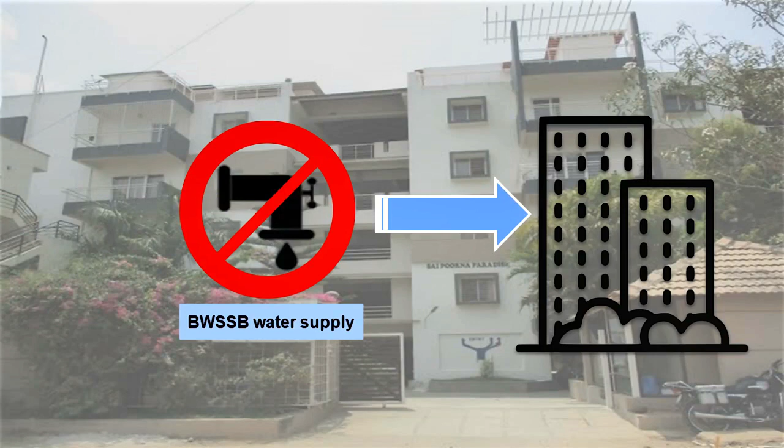The apartment complex requires about 50,000 to 55,000 litres of fresh water a day, and the per person water consumption is around 250 to 300 litres a day. The community does not have a Kaveri water connection, so they primarily relied on borewells and water tankers for their water needs.

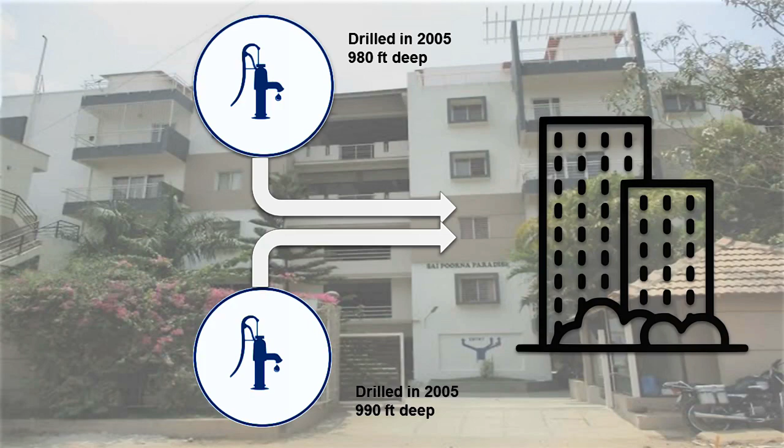The two borewells drilled in 2005 have been a primary water source. Over time, the borewell yield began declining, leading to a rise in the apartment's reliance on water tankers. Starting in 2017, the complex began heavily depending on water tankers for its daily water supply.

During an 8-month period from November to June, around 11 to 13 tankers, each with a 5,000 litre capacity, were procured daily at a cost of Rs 550 to Rs 600 per tanker. This reliance translated to an annual expenditure of Rs 16 to 18 lakhs.

Sai Poorna Apartments opted against obtaining a Bengaluru Water Supply and Sewerage Board Kaveri water connection due to the steep sum required as a deposit. Instead, the association has chosen to enhance water supply through alternative initiatives. These include rooftop rainwater harvesting, groundwater recharge, individual household metering, and using treated wastewater.

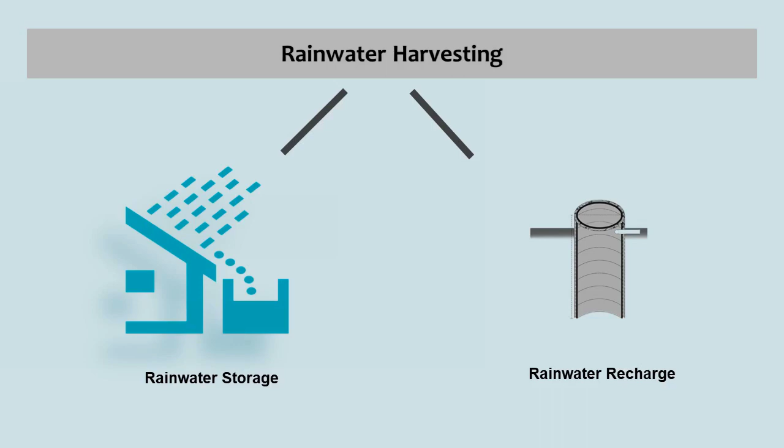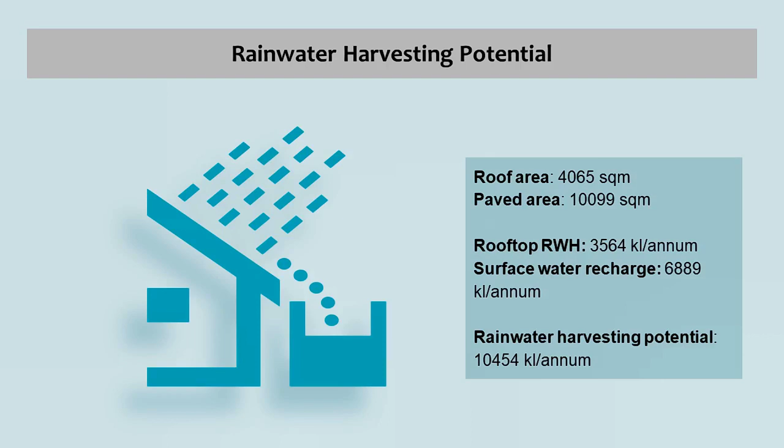Between 2017 and 18, Sai Poorna Paradise integrated rainwater harvesting and surface runoff into its water management strategy. This harvested rainwater serves a dual purpose, recharging the groundwater and providing a stored water source for various needs. Through meticulous calculations accounting for runoff and surface area, Sai Poorna Apartments can potentially harvest 10,454 kilolitres of rainwater annually.

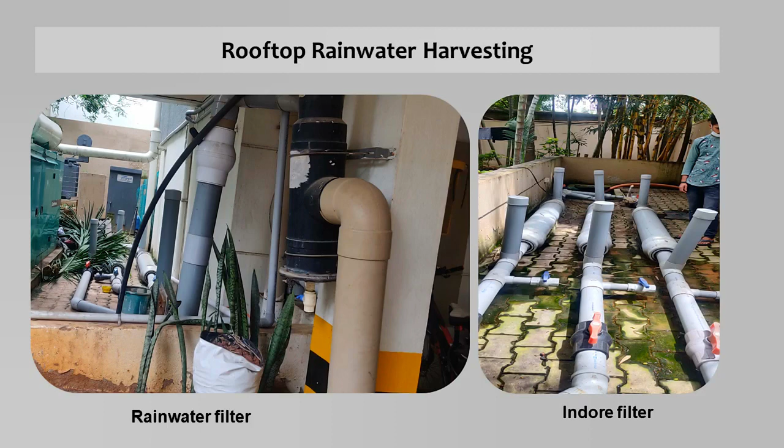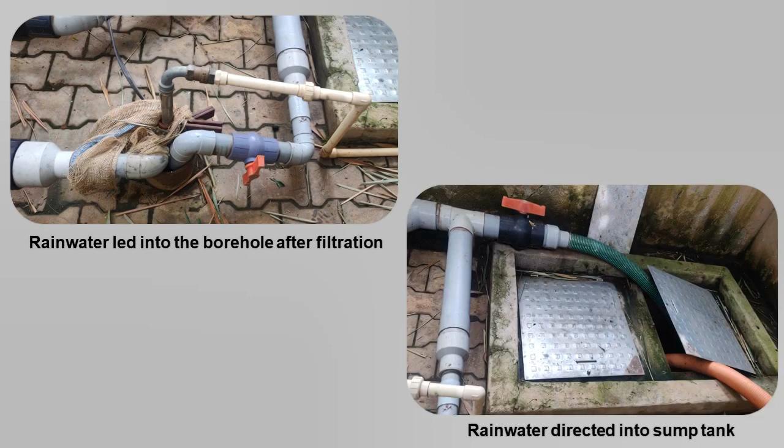The rainwater is filtered in a rainwater filter and subsequently passes through an in-pipe sand filter referred to as the Indore filter. This Indore filter incorporates jelly stones or crushed chips with sizes ranging from 20 mm to 40 mm. After filtration, the water is let into the borewells. A portion of the rooftop rainwater is guided to a sump tank via a controlling valve.

In 2018 and 19, 4 recharge wells were dug in low-lying areas which efficiently managed surface runoff. These wells, each measuring 5 feet in width, comprise 2 that are 15 feet deep and the other 2 which were initially 5 feet deep and deepened to 10 feet.

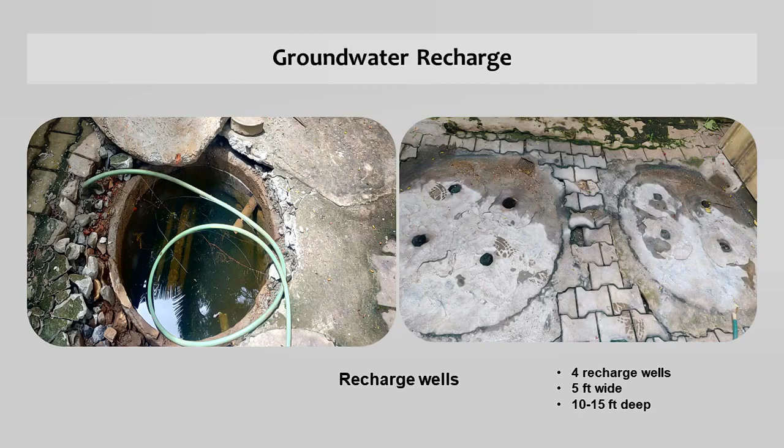The objective of the Residents' Welfare Association was to attain complete independence from water tankers. To achieve this, they introduced individual household metering in 2019-20. The apartment charges a fee of Rs 100 per kilolitre, equivalent to 10 paisa per litre, for water usage.

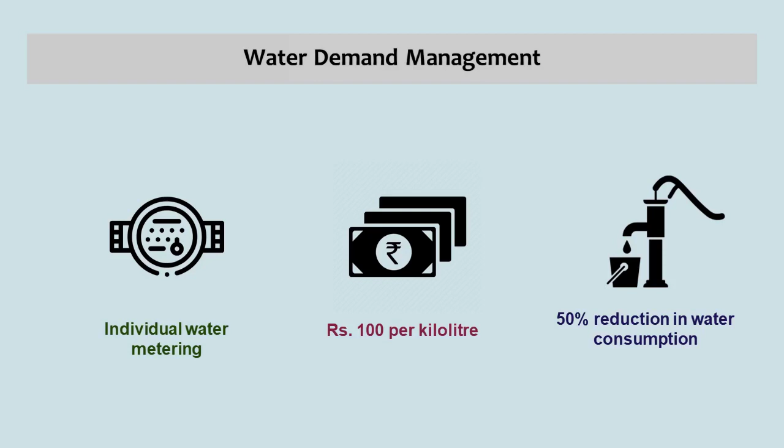Following the installation of these household meters, the water demand experienced a 50% decline. That is, the aggregate water demand decreased from 50,000 to 55,000 litres down to 27,000 litres per day. The apartment also houses a 60,000 litre capacity sewage treatment plant upgraded with silicone diffusers in 2019-20.

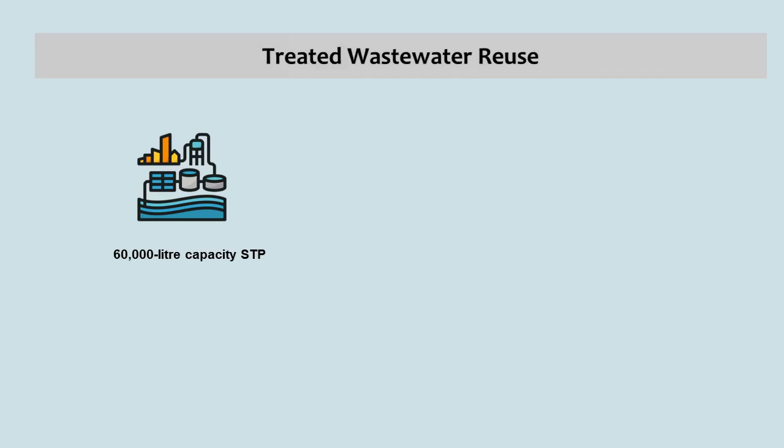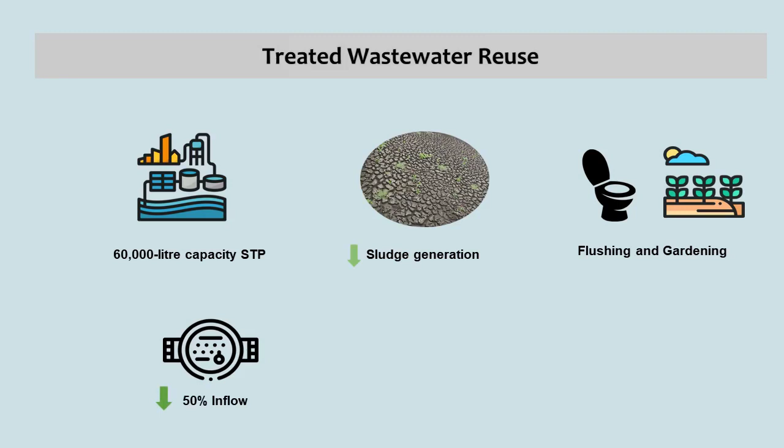This not only reduced sludge generation but also significantly lowered operational cost for the STP. The treated wastewater from the STP is used for flushing and gardening. With individual household metering, there was a notable reduction of 50% in the inflow to the STP. Thus, the annual STP operations expenditure reduced notably from Rs 90,000 to Rs 30,000.

The implementation of direct borewell recharge has significantly enhanced borewell yield. Consequently, the community's reliance on water tankers has diminished, dropping from 11 to 2 tankers over a 3-month period from April to June in a year.

This reduction in water tanker usage has resulted in cost savings, bringing down the expenses from Rs 18 to 20 lakhs to below 1 lakh rupees. The overall water consumption decreased from 50,000 to 55,000 litres a day to 27,000 litres a day.